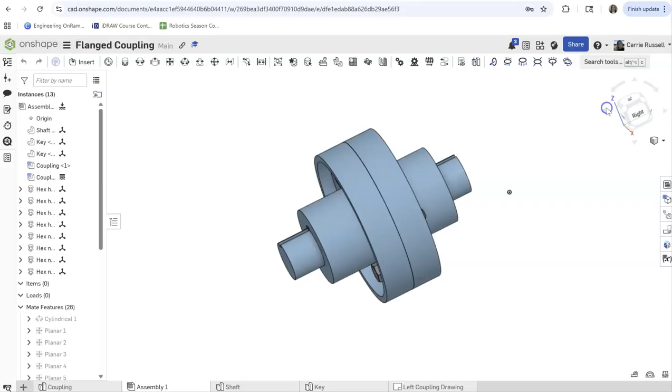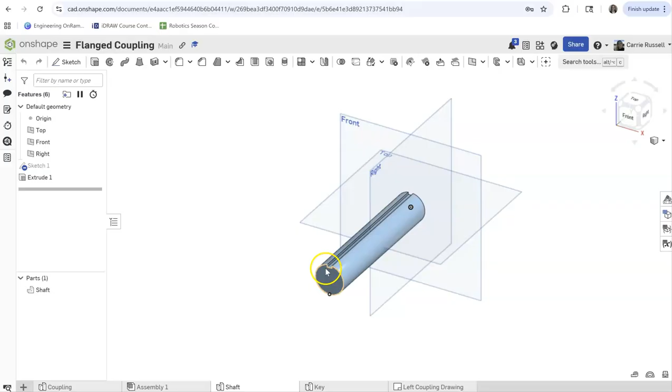You might notice there are some standard bolts that we'll be able to just pull from OnShape already, but there is a shaft here, and then inside here there's what we would call a key. Let me show you what those are going to look like. They don't take too much to make. It's this cylinder with this notch in it, that's the shaft, and this key is just a very simple steel rectangular part.

So let's get started. I'm going to take us into the coupling drawing that we already created. By creating it there, it makes it easier to insert into our assembly. Always double check at the bottom. Well, let's do this first. Let's change, you see how it says part 1? Let's rename this to coupling, like mine was, so that when we create these new parts we'll be able to easily find them. And then we're going to hit this plus key down here at the bottom and say create part.

The first part we're going to create is the shaft, so we can rename this as the shaft and hit enter, and then double check always that your units have stayed in millimeters. Because our other ones in this, these should, but I always ask that you double check that. I'm going to go to my front view now, and I'm going to create a sketch.

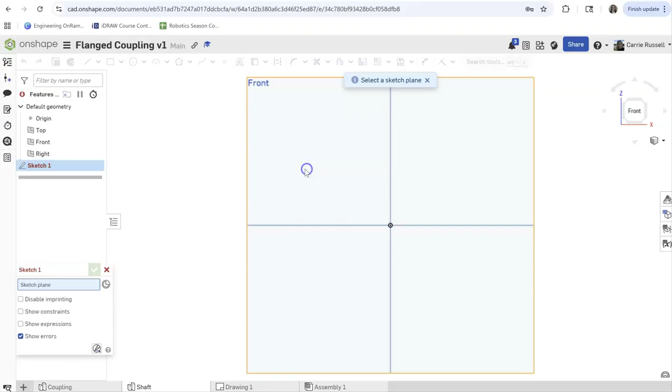On the front view, the shaft is basically a circle, so we'll do a center circle here. I'm going to hit escape and dimension this center circle to be 30. I'm going to zoom in just a little. So this is our circle.

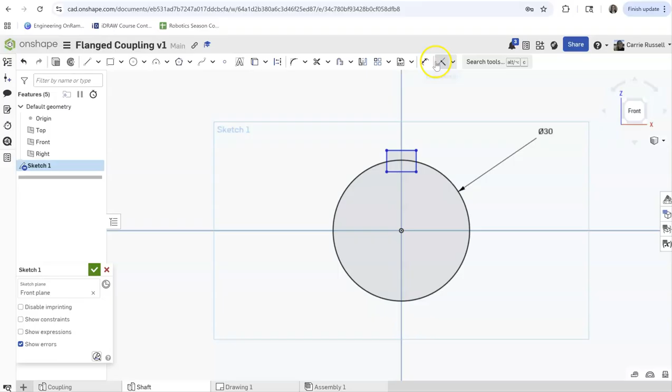We're going to put this notch at the top. We'd use a corner rectangle to do that, so I'm just going to create a rectangle up here. Escape out of that tool so I can dimension it. I'm going to dimension it such that the point from the bottom of the rectangle to the center is 13 millimeters. The overall width of this part is 5 millimeters.

The distance between the center of your circle and the edge, if we can get it to be okay with that, which it's not, so let me escape out of that. Let me try that again. We want to go from here to there. There we go. I'm going to pull this up, it's going to be hard to see. That's 2.5, and that's going to center that rectangle there.

That is basically what we need to do. We're going to do some trimming of this. So let's hit this trim tool, and we basically want to cut out the top of that circle. And that gives us that nice little notch in there.

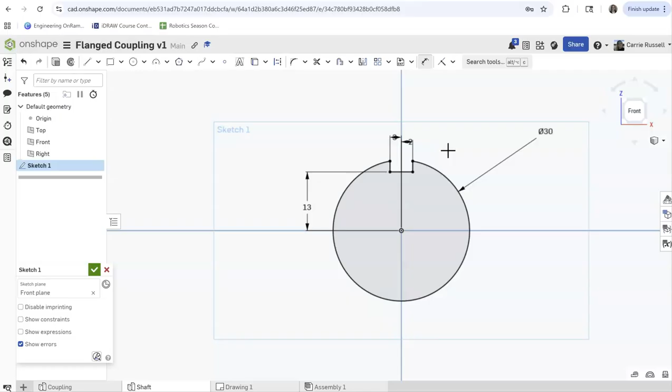Mine is not fully constrained. I think we're going to be okay here because we have dimension, but let us do this. Let us dimension from here. Let me hit my dimension tool one more time. And we'll dimension from here to there, and we'll make sure that's also 2.5, and then that gives us a fully dimensioned part.

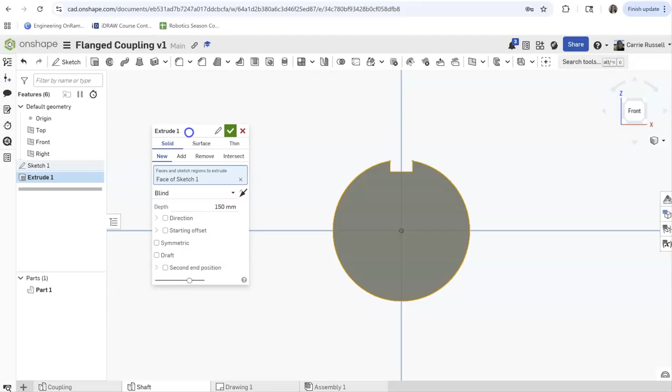We can go ahead and green check that now, and we're going to extrude this 150 millimeters. So I'll select that. Let me move this up so you can see it, and then I'll show you that when I move to the side, there it is. So let me go to my isometric view, and there is our shaft.

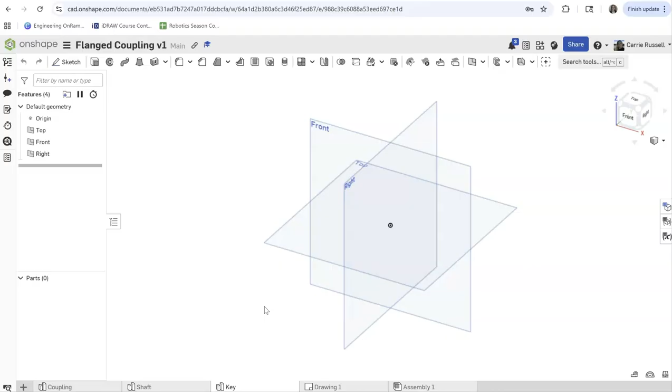We're going to keep moving because the key does not take very long. I'm going to hit plus, hit Create Part Studio. We're going to rename this as key. You can double check that your units are still in millimeters.

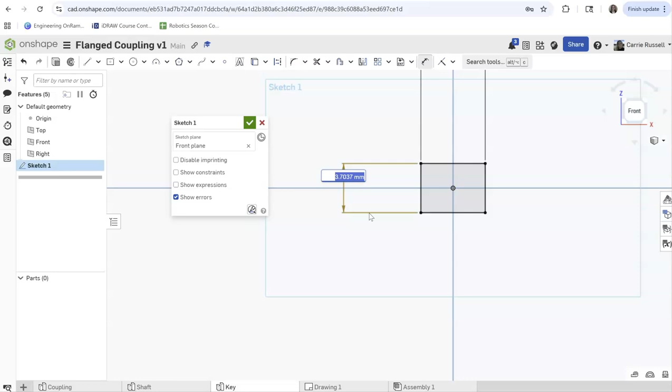We're going to go to the front view and create a sketch. As you might imagine, we can make a center point rectangle that's going to fit into the notch that we created, so you need to escape out of that. It is really just simply a 5mm wide, and I'll zoom in, by 5mm tall rectangle. There it is.

Isometric view here, zoom in. I'm going to extrude this, and this needs to be 30mm. So I'm going to green check that.

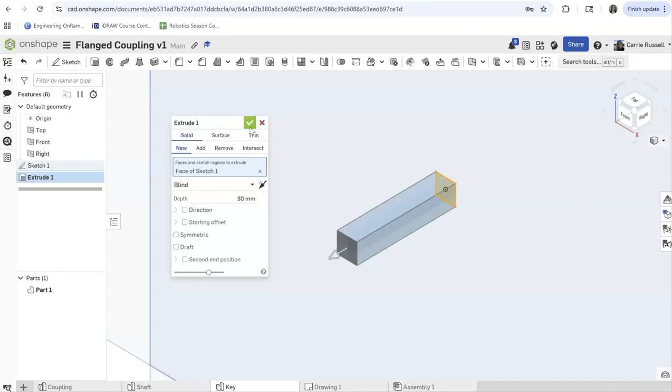There it is. And then let's go ahead, we haven't been doing a good job of assigning materials, but let's assign a material here, since we have a second, and I can just click on here. We're going to do 1020 steel.

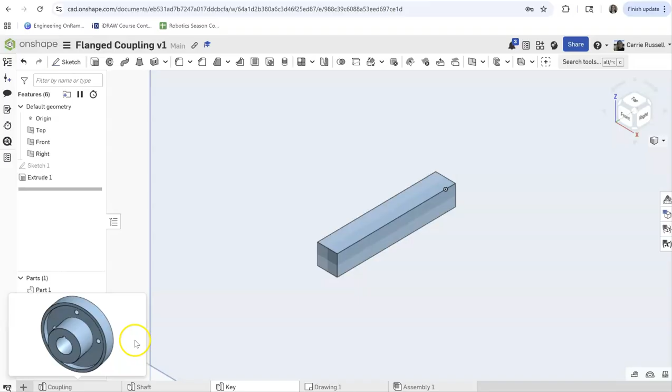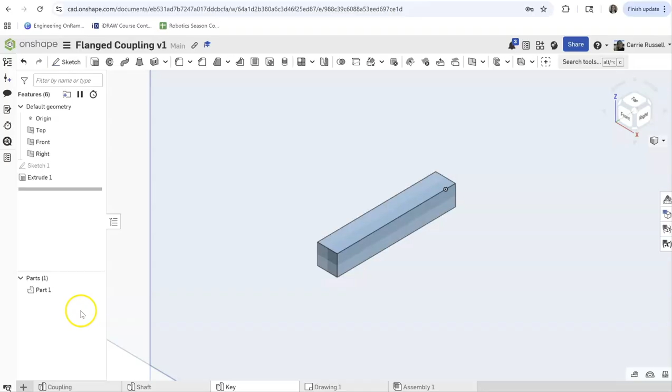All right, so now we have inside of your flanged coupling, we should have the coupling, and remember there are configurations for left and right in here. And now we should have the shaft and the key, and that'll allow us, when we're ready, to go ahead and create the assembly. So you can return this inside of your coupling document so that we can grade the key and the shaft, and then you'll be ready for the assembly.